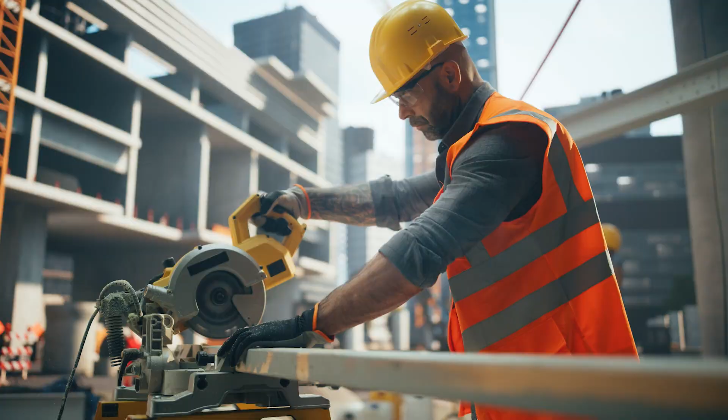On July 8, at 2:23 p.m., a tragic incident occurred involving an employee working for a utilities construction company. The worker was tasked with inspecting a water main valve inside an underground vault, a confined space that required careful atmospheric monitoring. During the inspection, the employee unexpectedly lost consciousness and collapsed inside the vault. Due to a critically low oxygen level in the confined space, the worker asphyxiated before anyone could provide emergency medical assistance.

Following the incident, OSHA conducted a thorough investigation, uncovering multiple safety violations, each underscoring essential requirements for confined space safety. These violations illustrated gaps in the company's approach to confined space entry, specifically in the areas of hazard evaluation, ventilation, and training. OSHA requires employers to designate a competent person capable of identifying and assessing all confined spaces in the workplace. In this case, the employer had not assigned anyone to evaluate and monitor the underground vault, a critical omission. This lapse meant that confined space hazards like low oxygen levels were not identified or addressed prior to entry, leading to a preventable tragedy.

The employer also had not conducted atmospheric testing for oxygen levels, toxic gases, or other potential hazards before allowing the worker to enter the vault. OSHA requires thorough pre-entry testing to confirm the safety of confined spaces. The lack of testing meant that the dangerously low oxygen levels went undetected, putting the employee at fatal risk.

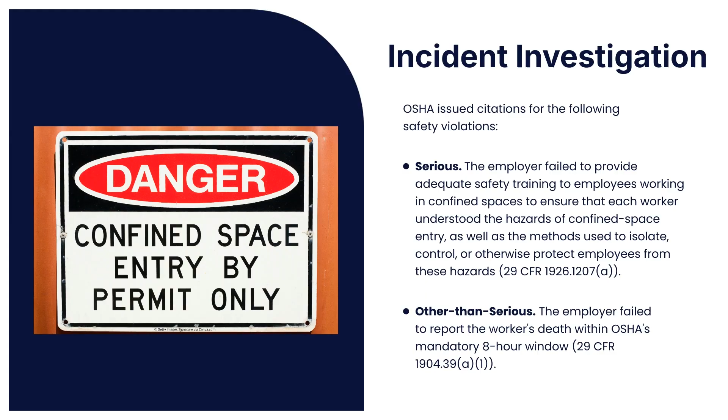On July 29, at 9:25 a.m., 2 employees at a landscaping company were preparing to begin a hydroseeding project on a high school football field. The team was using a hydroseeding truck, which included a large tank designed to mix and spray seed, water, and fertilizers. Before starting, one worker opened the tank hatch to visually inspect the auger system for any clogs. While doing so, the worker lost their footing, slipped, and fell into the tank, where they were quickly overcome by fertilizer fumes accumulating inside the enclosed space.

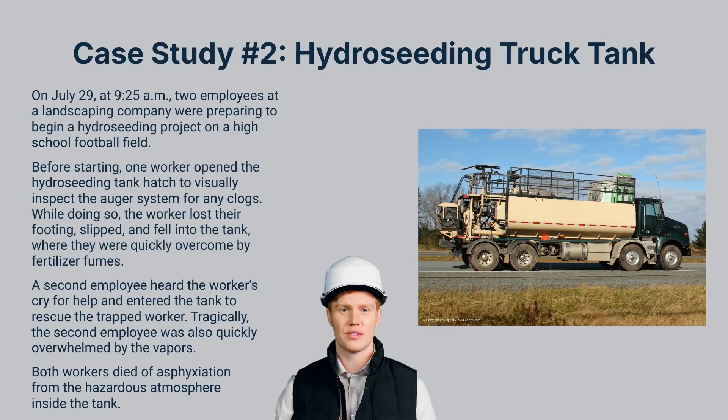Another employee heard the worker's cry for help, immediately climbed to the top of the vehicle, and entered the tank to rescue the trapped worker. Tragically, the second employee was also quickly overwhelmed by the vapors. Both workers died of asphyxiation from the hazardous atmosphere inside the tank. After the incident, OSHA conducted an investigation and issued a citation to the employer for a serious safety violation, highlighting the need for proper hazard assessment and respiratory protection in confined spaces.

OSHA's investigation revealed that the employer had not identified or evaluated the respiratory hazards associated with the hydroseeding tank. Federal OSHA safety standards require employers to assess potential respiratory hazards and provide adequate protection to workers, especially in confined spaces where hazardous atmospheres may accumulate. The employer's failure to recognize the tank as a confined space and evaluate the risks of deadly fumes led directly to the tragic loss of both workers.

The absence of a confined space assessment meant that the employees entered an enclosed area with potentially toxic and oxygen-depleted air without any respiratory protection or monitoring equipment to warn them of dangerous gas levels. The employer's failure to provide adequate protective measures, such as atmospheric testing, ventilation, or respiratory protection, exposed both employees to fatal respiratory hazards. This incident highlights the critical importance of confined space hazard evaluations, especially in tanks and enclosed areas where vapors or fumes can collect.

Employers must carefully assess confined spaces, test for hazardous atmospheres, and provide appropriate respiratory protection and rescue protocols to prevent tragedies. OSHA standards for confined space entry exist to protect workers from unforeseen hazards, and strict adherence is essential to maintaining a safe work environment.

On the morning of July 7, a construction crew working for a water and sewer line company was involved in an incident that tragically highlighted the importance of OSHA's confined space safety protocols. At around 11 a.m., workers were attempting to remove a 24-inch rubber plug from a sewer pipe located within a 24-foot deep wet well. The crew first attempted to pull the plug using an attached nylon rope, but due to pressure caused by wastewater entering the well, the plug was wedged tightly into a T-shaped fitting.

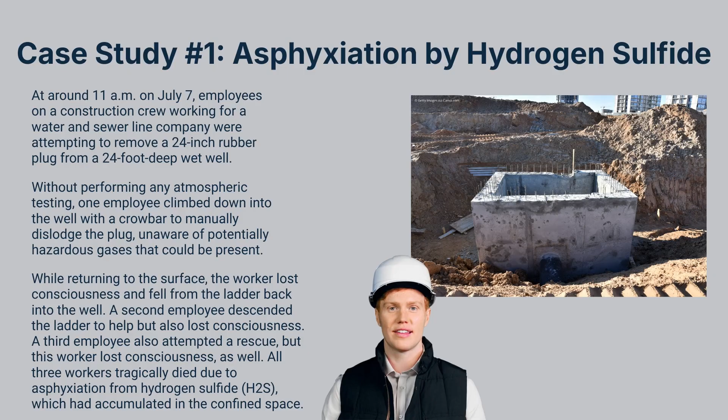Without performing any atmospheric testing, one employee climbed down into the well with a crowbar to manually dislodge the plug, unaware of potentially hazardous gases that could be present. After struggling to remove the plug, the employee attempted to climb back up the ladder just 2 feet from the surface. However, the worker lost consciousness and fell back into the well. Recognizing the emergency, a second employee descended the ladder to help but also lost consciousness upon entering the space. A third employee also attempted a rescue, but this worker lost consciousness as well. All 3 workers tragically died due to asphyxiation from hydrogen sulfide gas, which had accumulated in the confined space.

OSHA's investigation into the incident uncovered multiple serious safety violations, many of which underscored the importance of adhering to confined space entry protocols designed to protect workers from atmospheric and physical hazards. The employer failed to designate a competent person to identify, evaluate, and test confined spaces on site. A competent person could have recognized the permit-required confined space, assessed potential hazards, and ensured that it was safe before allowing workers to enter. OSHA also found that the employer did not evaluate potential hazards within the confined space before allowing workers to enter. Had this evaluation been conducted, the employer might have identified the potential presence of hydrogen sulfide gas and other atmospheric hazards in the wet well.

Additionally, the wet well's opening, measuring nearly 8 feet by 6 feet, was left unguarded, exposing workers to a serious fall risk. OSHA fall protection standards require employers to secure confined space openings with guardrails or temporary barriers to prevent such falls. Under federal law, employers must test for breathable oxygen levels, flammable gases, and potential toxic contaminants before allowing employees to enter a confined space. However, in this case, the employer failed to conduct any such testing. As a result, the workers were exposed to lethal levels of hydrogen sulfide gas without any warning.

OSHA also requires employers to purge, inert, flush, or vent confined spaces to remove or control atmospheric hazards. No such measures were taken to address the presence of hydrogen sulfide, contributing directly to the workers' exposure to lethal concentrations of the gas in the well's hazardous atmosphere. Employers must also ensure that emergency rescue equipment is readily available when employees are working in confined spaces. OSHA found that the company failed to have any such equipment on hand, violating federal safety requirements. Without this equipment, the workers' colleagues could not effectively attempt a safe rescue.

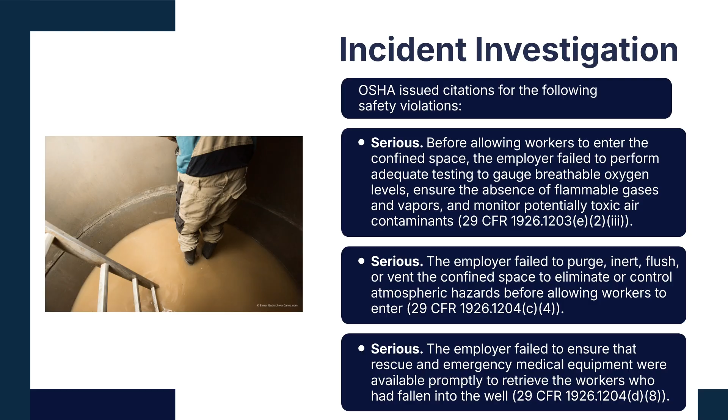OSHA also requires employers to develop written protocols for emergency rescue, medical treatment, and protection from unauthorized rescue attempts. In this case, no such protocols were in place, leading to an unplanned rescue attempt by untrained personnel, which ultimately resulted in further needless fatalities. Importantly, an entry permit detailing compliance with OSHA's confined space requirements should have been prepared before entry. The lack of a documented permit violated federal OSHA safety standards and underscored the absence of systematic hazard identification and control.

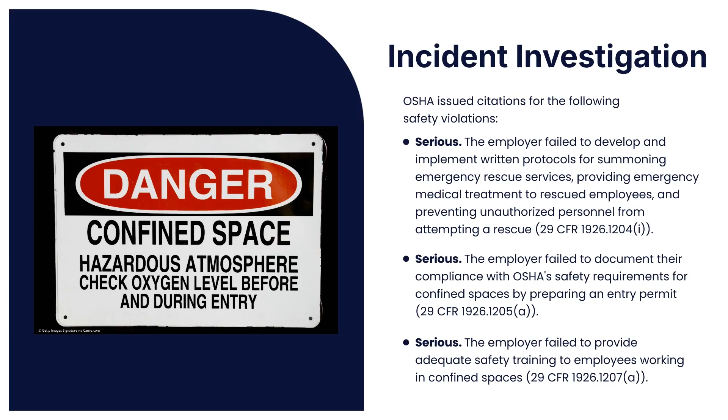The employer also failed to provide the necessary confined space safety training to help workers understand the risks and proper protocols associated with entering confined spaces. Without this training, employees remained unaware of the hazards of confined space entry and the measures necessary to mitigate them.

Finally, OSHA cited the employer for failing to provide training specific to each worker's role in confined space entry, including the responsibilities of entrants, attendants, and supervisors. This lack of role-specific training left employees ill-prepared to safely manage confined space work or respond effectively in an emergency.

This tragic case serves as a critical reminder of the essential nature of OSHA's confined space safety requirements in the construction industry. Proper planning, atmospheric testing, effective training, and the use of rescue equipment are vital to preventing fatal incidents in confined spaces. Employers must take these precautions seriously to protect their workers and avoid preventable tragedies like this one.

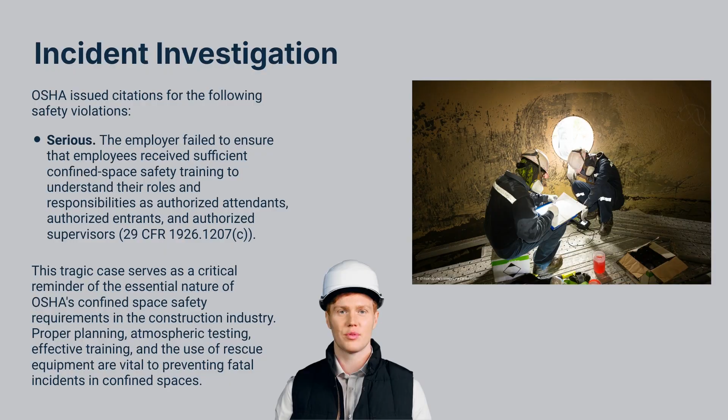On the afternoon of November 25, at around 1:30 p.m., a construction worker was performing routine tasks on the 7th floor of a high-rise building under construction. The worker was assigned to spray water onto concrete columns beneath the temporary framework built to support a substantial concrete pour on that floor. Tragically, the poured concrete weighed significantly more than the shoring system could handle. Without warning, the framework buckled under the weight, and the 7th floor collapsed, sending tons of wet concrete down onto the employee below, who was immediately and fatally crushed.

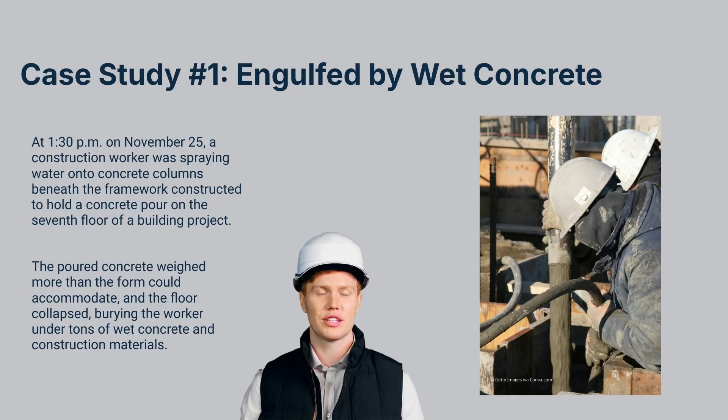Following the incident, OSHA conducted a thorough investigation and identified multiple safety violations. The findings underscored the critical importance of adhering to OSHA's standards for concrete and masonry work. OSHA cited the employer for a serious violation related to the inadequate review of the shoring plans provided by the engineering firms. The initial plans, as well as subsequent revisions, had failed to account for the additional load imposed by a thicker 24-inch concrete slab.

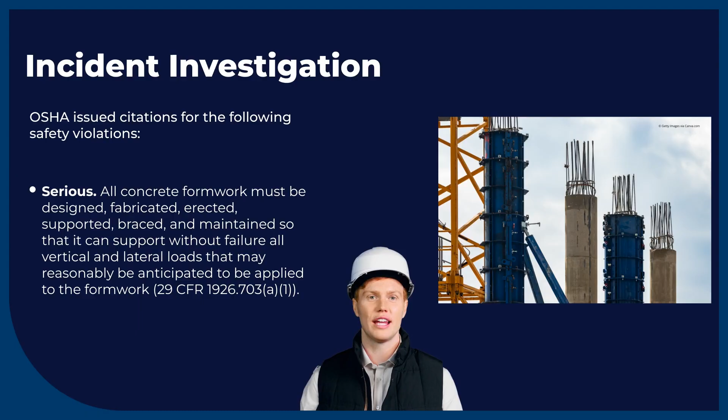OSHA regulations stipulate that all concrete formwork must be designed, erected, supported, and maintained to withstand any reasonably expected vertical or lateral loads. Unfortunately, the formwork in this case was not built to endure the actual weight of the poured concrete, resulting in a fatal structural failure.

In addition to the failure in load-bearing design, OSHA noted an other than serious violation concerning inadequate training. The employer had permitted employees to erect formwork for cast-in-place concrete without providing the necessary instructions on safe procedures and regulatory requirements. Under federal law, employers must ensure that workers receive proper training to recognize and avoid hazards. The lack of instruction put workers at increased risk during formwork operations, leaving them unprepared to handle potential safety hazards effectively.

This tragic case highlights the absolute necessity for compliance with OSHA's safety regulations in the construction industry, especially for concrete and masonry work. Proper adherence to formwork standards, combined with robust training, is essential to safeguard workers' lives and prevent avoidable accidents.

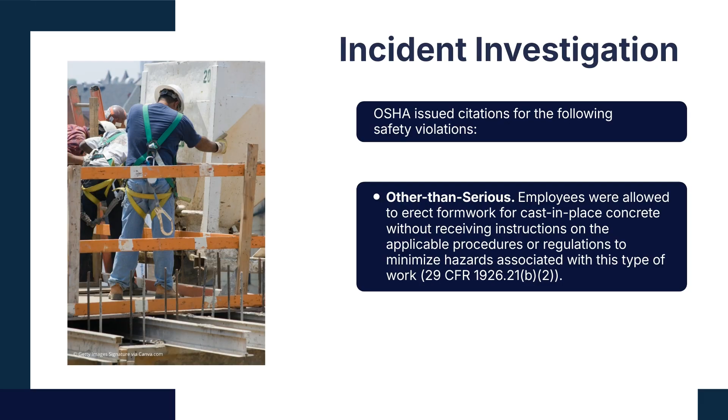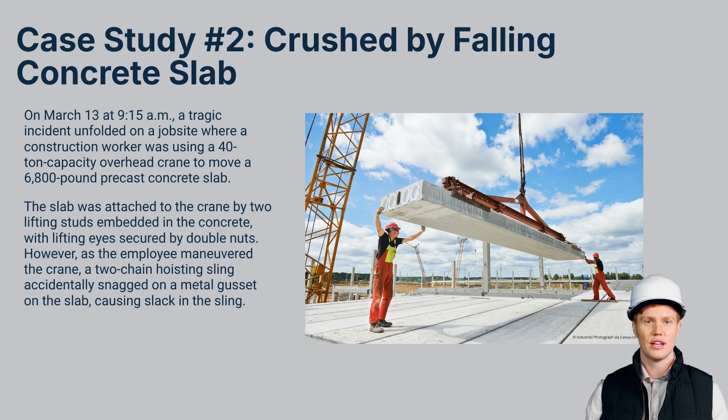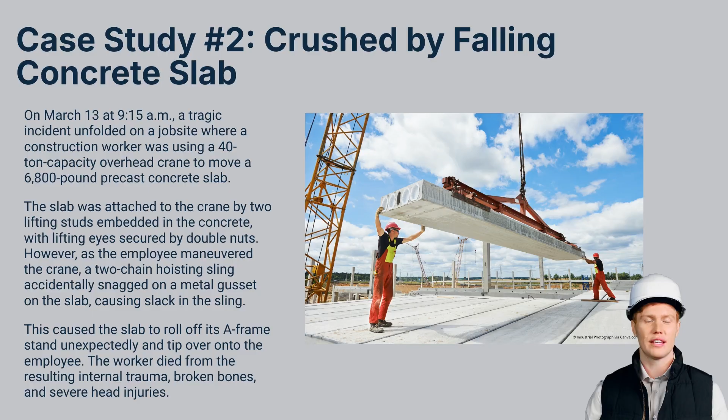On March 13 at 9:15 a.m., a tragic incident unfolded on a job site where a construction worker was using a 40-ton capacity overhead crane to move a 6,800-pound precast concrete slab. The slab was attached to the crane by two lifting studs embedded in the concrete, with lifting eyes secured by double nuts. However, as the employee maneuvered the crane, a two-chain hoisting sling accidentally snagged on a metal gusset on the slab, causing slack in the sling. This caused the slab to roll off its A-frame stand unexpectedly and tip over onto the employee. The worker died from the resulting internal trauma, broken bones, and severe head injuries.

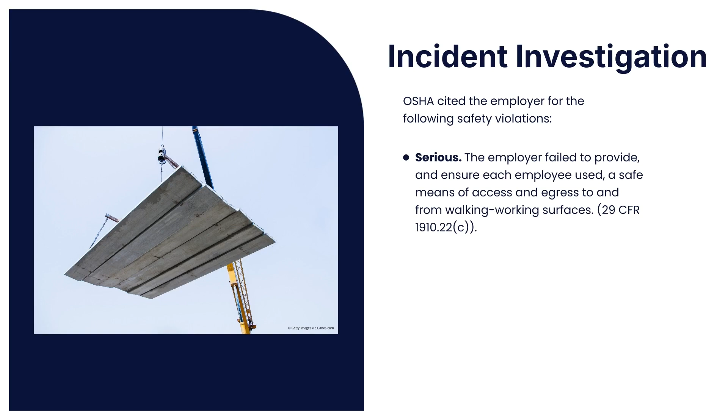During their subsequent investigation of the incident, OSHA identified several violations that contributed to this worker's death, emphasizing the importance of safety standards to prevent such tragedies. OSHA issued a serious citation for the employer's failure to provide safe access to working areas. The employer had placed an extension ladder against a wall next to the concrete panel, obstructing the walkway between the acid wash area and other parts of the site. This setup left workers with a blocked path, creating a hazard in case of an emergency.

Under federal OSHA standards, employers must maintain clear egress routes to ensure worker safety when moving to and from work areas. A second serious violation involved inadequate precautions in handling the crane's two-chain sling. OSHA's investigation revealed that the employer did not ensure the sling was properly cleared of obstacles during use. As the crane hoist lifted the slab, the chain sling snagged on a metal gusset embedded in the slab, causing the concrete panel to flip off its support and fall.

This exposed employees to severe crushing hazards, a clear violation of OSHA safety standards, which require employers to prevent slings from catching on obstacles and posing potential dangers to workers and pedestrians.

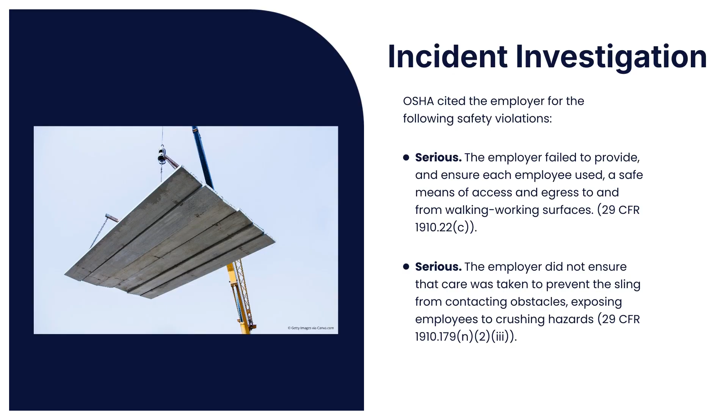OSHA also cited the employer for an other than serious violation regarding inadequate training for crane operators. Specifically, the crane operator had not received instruction on the proper storage of radio remote controls, increasing the risk of accidental crane activation when the operator was not facing the equipment.

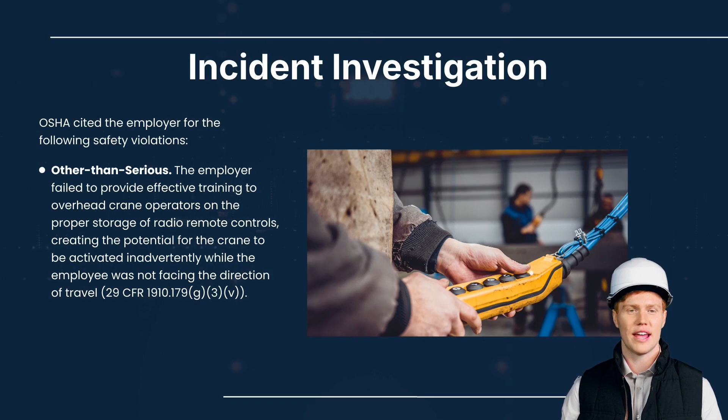This tragic incident highlights the fact that working with concrete is always dangerous and is often connected to many seemingly unrelated topics like crane safety, proper access and egress, and effective training for employees. The importance of clearing walkways, securing rigging from obstacles, and providing thorough training on how to operate equipment safely cannot be overstated, as these measures are vital in safeguarding lives on the job site.

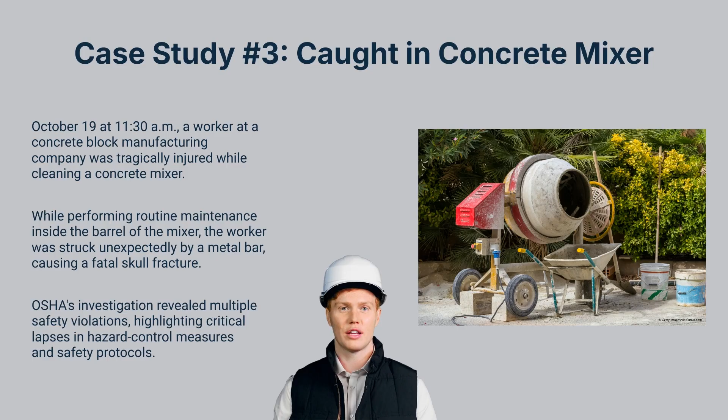Shortly before noon on October 19, a worker at a concrete block and brick manufacturing company was tragically injured while cleaning a concrete mixer. While performing routine maintenance inside the barrel of the mixer, the worker was struck unexpectedly by a metal bar, causing a fatal skull fracture. OSHA's investigation revealed multiple safety violations, highlighting critical lapses in hazard control measures and safety protocols.

After examining the site, OSHA issued several citations, emphasizing the importance of proper machinery safety procedures, lockout/tagout practices, and electrical safety requirements. Under the General Duty Clause of the OSHA Act, federal OSHA requires employers to maintain a safe workplace free from recognized hazards. In this case, OSHA cited the employer for failing to ensure safe equipment use.

The mixer's hood, weighing nearly 100 pounds, was lifted and held open by a hook that lacked a safety latch. Although the hook was designed to prevent accidental load slips, it was not properly secured, increasing the risk of hazardous movements during cleaning. Another serious violation involved the absence of lockout/tagout procedures to prevent the mixer from re-energizing during cleaning.

OSHA requires employers to implement lockout/tagout devices to control hazardous energy. However, in this case the employer allowed workers to clean the mixer without first placing its energy isolation device in a de-energized state and securing it with a lockout or tagout device. This lapse in judgment exposed employees to dangerous caught-in or crushed-by hazards from unanticipated machine movement.

OSHA also noted a serious violation involving electrical safety. The mixer was connected to a 110-volt electrical box with an unused opening. OSHA's electrical safety standards require that all unused electrical openings be properly closed to prevent contact with live electrical components. The failure to seal this opening created a risk of electrical shock or burns for employees working around the mixer.

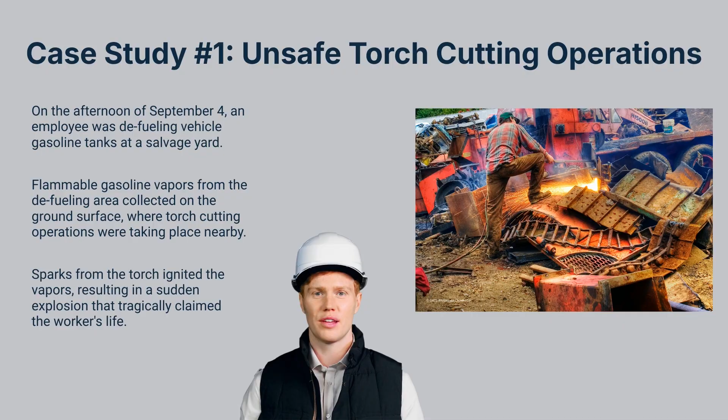On September 4 at 3 p.m., an employee at a salvage yard was conducting routine defueling of vehicle gasoline tanks when disaster struck. Flammable gasoline vapors from the defueling area collected near the ground surface, where torch cutting operations were taking place nearby. The sparks from the torch ignited the vapors, resulting in a sudden explosion that tragically claimed the worker's life. OSHA's investigation of the incident identified several federal safety violations, underscoring critical gaps in the employer's fire protection measures.

First, OSHA requires all fire hazards to be removed from areas where work like torch cutting may generate sparks. In this case, the employer failed to ensure the work area was free from such hazards, exposing employees to a highly combustible environment. OSHA also found that the employer allowed torch cutting in an area where gasoline vapors were present, a clear violation of safety standards for work performed near flammable vapors. This decision greatly increased the likelihood of ignition and highlighted the employer's lack of adequate safety planning.

The investigation also revealed that the employer had not relocated combustible materials to a safe distance of at least 35 feet from the work site. Instead, the worker who died had been defueling vehicle gas tanks near torch cutting operations, creating an environment ripe for fire and explosion.

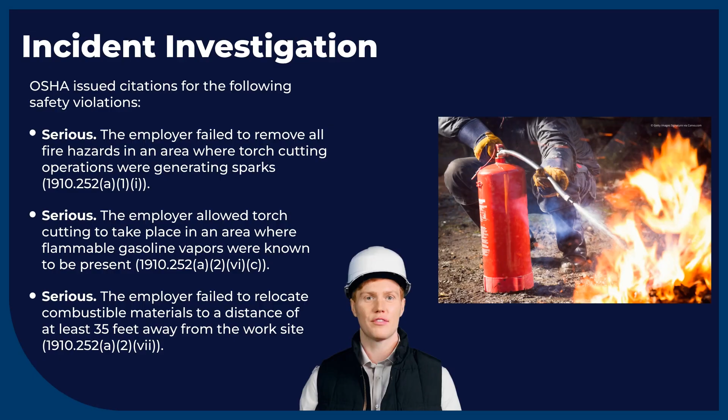Additionally, the employer's failure to conduct a thorough hazard assessment was another significant oversight. Employers must perform hazard assessments before authorizing any work involving fuel handling and work that may generate heat or sparks, yet in this case, no such assessment was conducted. Lastly, oxygen cylinders were being stored near highly combustible fuel gas cylinders, a proximity that heightens the risk of explosive reactions.

This tragic incident underscores the vital importance of following OSHA's fire protection guidelines, especially in high-risk operations involving flammable materials. Regular hazard assessments, strict control of combustible materials, and safe storage of fuel sources are essential to preventing such devastating workplace accidents.

On the afternoon of September 20th, a routine tank cleaning task at a pest control company became a tragic reminder of the importance of proper fire protection and emergency retrieval measures. At 2 p.m., an employee was tasked with draining residual brine water from an 8-foot deep, 10,000-gallon fiberglass tank previously used to store gasoline. However, after entering the tank, the worker began operating a power drill, which caused sparks that ignited lingering gasoline fumes. The explosion that followed completely engulfed the worker, fatally burning them.

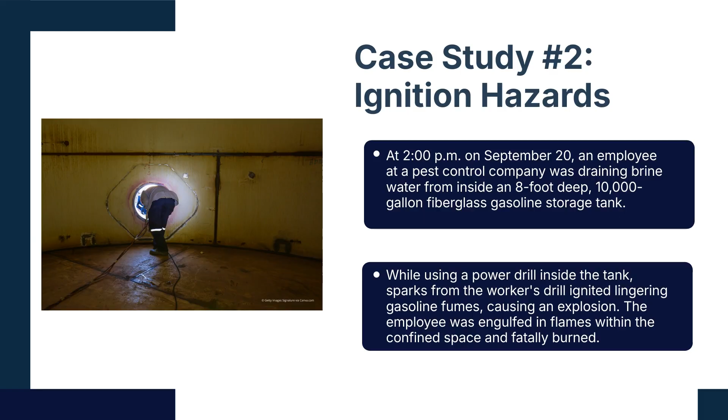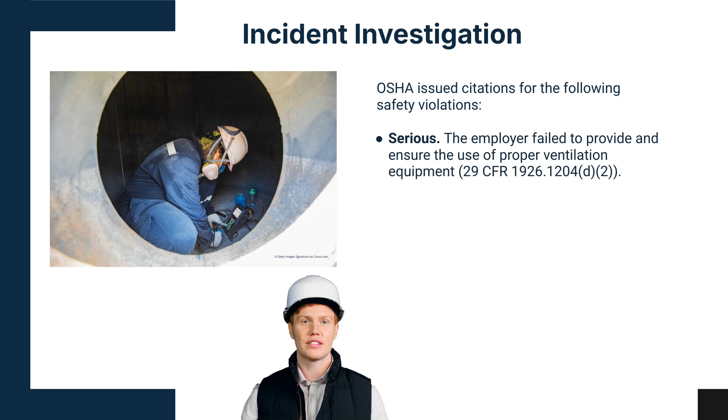OSHA's investigation revealed that the incident stemmed from a series of critical oversights in fire protection and confined space safety protocols. Chief among these was the absence of a forced air ventilation system, which could have removed the hazardous fumes before work began. The employer also failed to perform the required atmospheric testing to confirm that the environment within the tank was safe to enter.

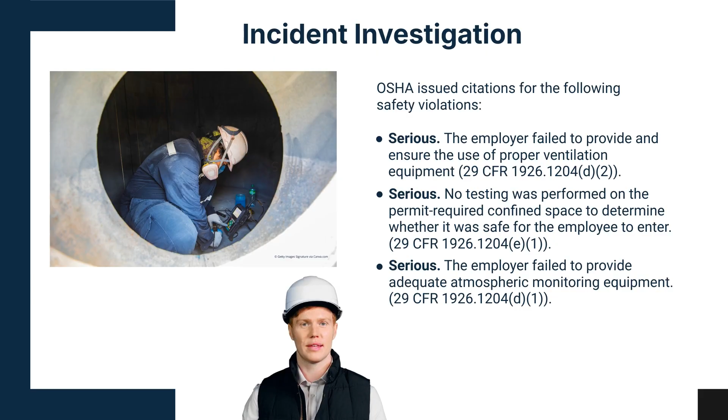Adequate fire protection in confined spaces is essential, particularly when flammable materials may be present. OSHA requires employers to take specific steps to eliminate fire hazards in such spaces, including purging, inerting, flushing, or ventilating, yet none of these were implemented. Nor did they provide continuous atmospheric monitoring to detect any dangerous changes in air quality. Furthermore, OSHA mandates that employers must use constant monitoring equipment when workers enter confined spaces with flammable substances, but the employer neglected this requirement as well.

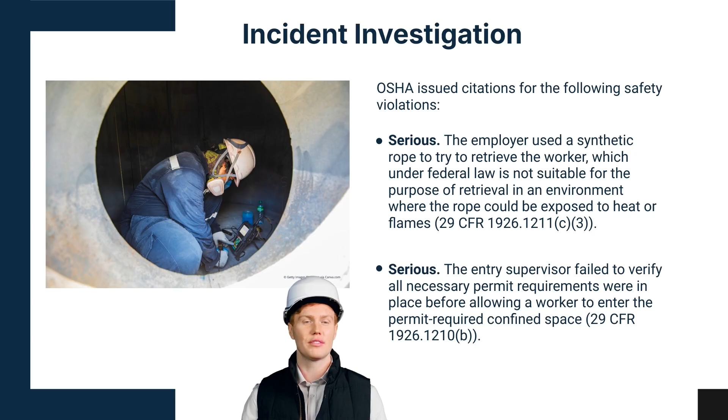In addition, OSHA found that the employer had failed to ensure that a suitable mechanical device was in place for emergency retrieval in the event of a fire. Instead, the company relied on a synthetic rope, which is prohibited in potentially high-temperature environments because it may burn or fail under heat. Compounding these failures, the supervisor allowed the entry without verifying that all permit requirements for confined space entry had been met. This case illustrates the dangers of failing to adhere to OSHA's fire protection and confined space regulations, underscoring the importance of ventilation, monitoring, and emergency preparedness.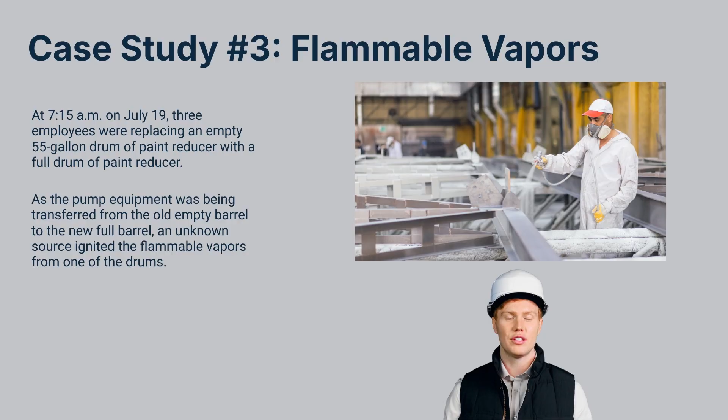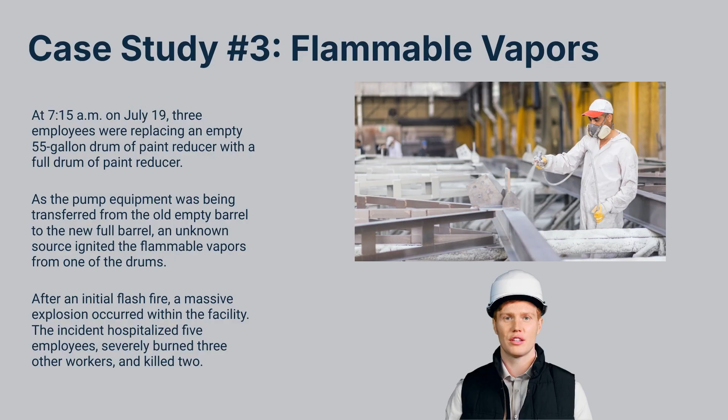On July 19 at 7:15 a.m., a routine operation at a manufacturing facility turned catastrophic. 3 employees were tasked with replacing an empty 55-gallon drum of paint reducer with a full one. As they moved the pump equipment from the empty drum to the new one, an unknown ignition source set off a flash fire, rapidly followed by an explosion fueled by the flammable vapors. The incident resulted in the hospitalization of 5 employees, severe burns for 3 others, and the tragic loss of 2 lives.

OSHA's investigation revealed that the employer's disregard for essential fire protection measures in handling flammable liquids contributed significantly to the accident. First, the facility stored nearly 550 gallons of Category 2, 3, and 4 flammable liquids, more than 4 times the legally permitted amount of 120 gallons. Proper storage limits on flammable materials reduce the risk of life-threatening fires. By exceeding them, the employer had set the stage for a disaster.

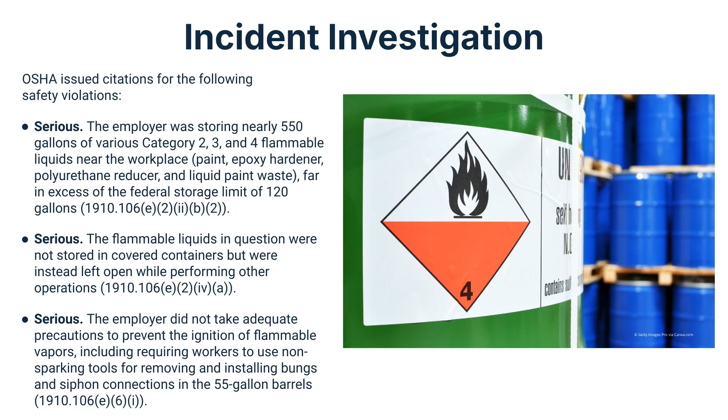Adding to the hazard, containers holding these flammable liquids were left open while workers performed other operations, allowing vapors to escape into the workspace. Compounding this issue, the employer failed to ensure that workers used non-sparking tools for removing and installing bungs and siphon connections on the barrels, a crucial precaution to prevent accidental ignition. OSHA also found that workers used polyurethane reducer for pump cleaning without bonding or grounding the equipment, a necessary step to avoid static buildup, which was a likely cause of this fire and subsequent explosion.

Additionally, employees had not been trained in critical safety procedures for grounding and bonding or handling flammable liquids, leaving them unprepared for these dangers. This case illustrates the severe consequences of overlooking OSHA's fire protection requirements, particularly when handling flammable substances. Adhering to storage limits, using proper tools, and providing thorough safety training are essential steps to prevent such tragic incidents.